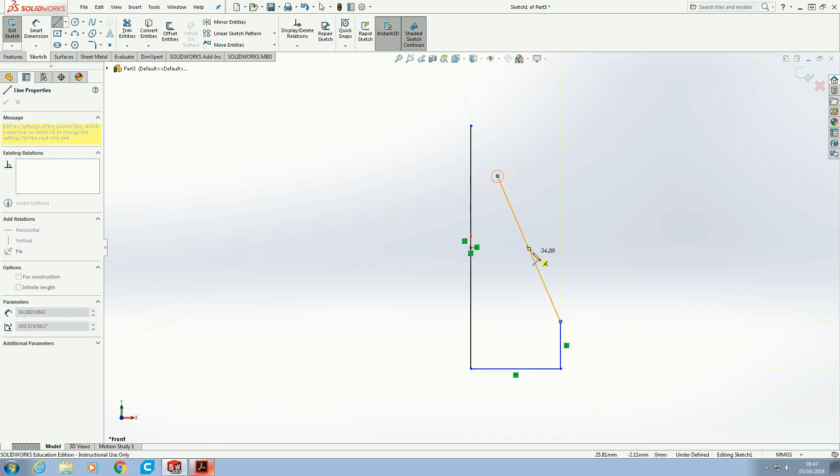5 for that bit, 10 for that bit, and 15 degrees for there. Okay, so that's fairly simple, standard, same as we've done before. There we go. So the whole thing this time is 62.5 tall to the centre of the sphere at the top, and the sphere at the top has a radius of 2.5, so the whole thing is 65 tall.

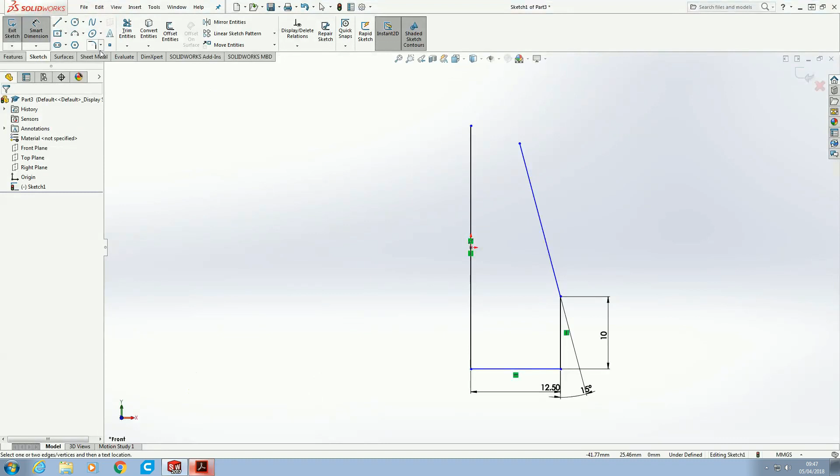So if we just make this back line 65, straight away it's a bit bigger than we're used to. Just drag this up here somewhere so we've got a reference point. So going on to here, right at the top we've got a little sphere, same way we created a sphere before, little 3-point semicircle. Remember to click the center point, hold control, click the line and coincident them so they lock on.

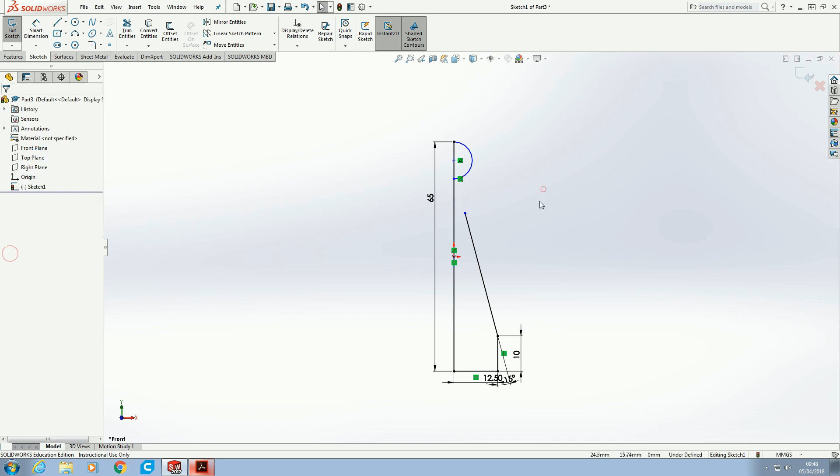So then all you've got to do is give it a radius, which was 2.5 I believe. Yeah, there we go, 2.5. Okay. So that's all the easy bits really, nothing new there at all. The complicated bit is this central section here. Now it's not a sphere, it's slightly offset, and the way that I've achieved that is by using something called the spline tool. What that basically allows us to do is to draw a curved line, but rather than giving it a radius, so it doesn't have to be a regular arc, we give it a set of coordinates for the points, which is what all of these bits here are.

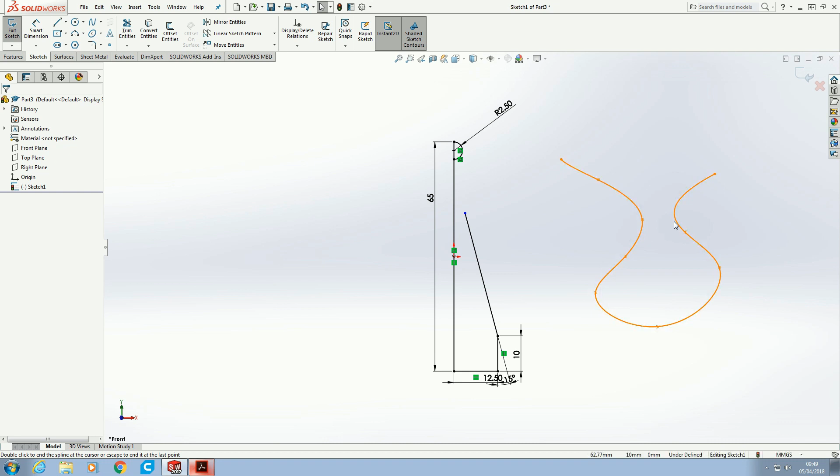So to do that, up at the top here, got the spline tool, and basically how this works is you drop in one point, and every time you click your mouse it drops a new reference point in, so it can quite happily fly around and do lots of multiple shapes, and when you get to the end, if you just hit escape, it will lock it to the last point you made. So you can quite quickly make very complex curves, and then by moving the individual points it changes the shape of it.

Now what we're going to do is draw a relatively simple one by comparison and then dimension all the points. So I'm going to click on the line just up here somewhere. That's the first point there, I want 1, 2 and then the end point clicks back onto the line. Okay, and then just hit escape. So what we're going to do there is then dimension it into place.

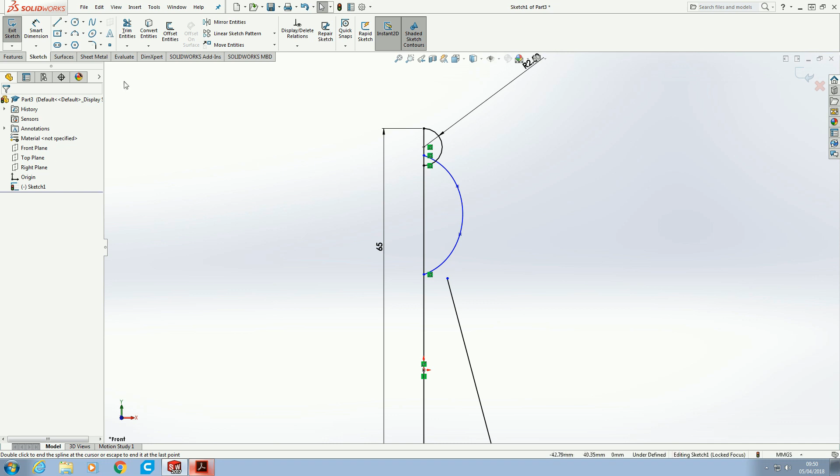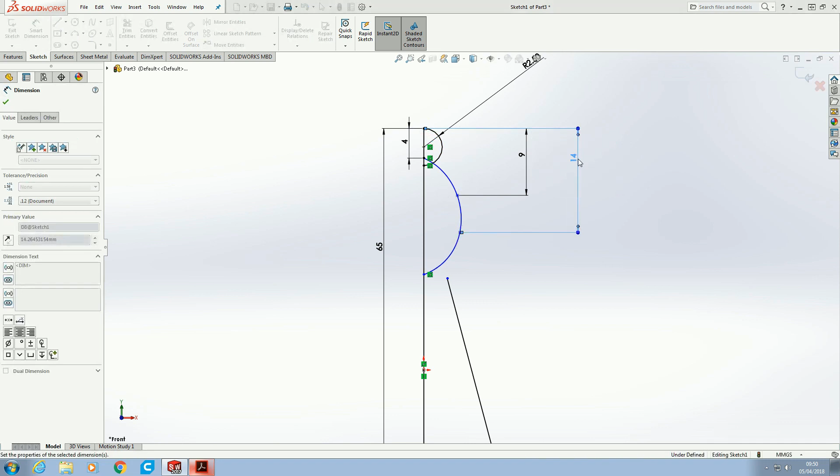So that end line, our start point there is 4 mil, so it's 4 mil from the top there. There we go. The next one's 9 mil from the top, so start going this side. 9, 14 and 19. Okay, so that's given us all the depths that way.

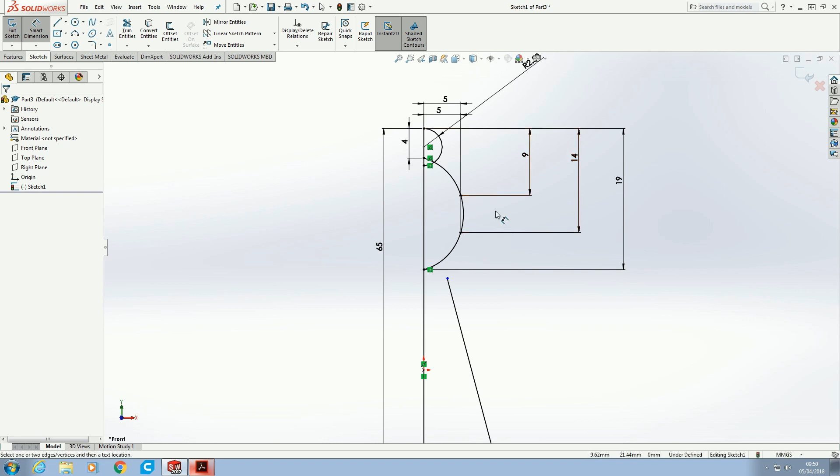Now the only other thing is this 5 mil here, so if we go from here to here, 5 mil there, and 5 mil on that one because they're the same. Now I've got 2 dimensions there. We could start using a few relations to make things a bit more tidy. So we click on that point and that point, and just hit vertical. Vertical does the same job. Okay, so we quite clearly see that that has become fully dimensioned. Got this dangling line here, so I'm just going to lock that onto there. There we go, so that's continued up at the right angle.

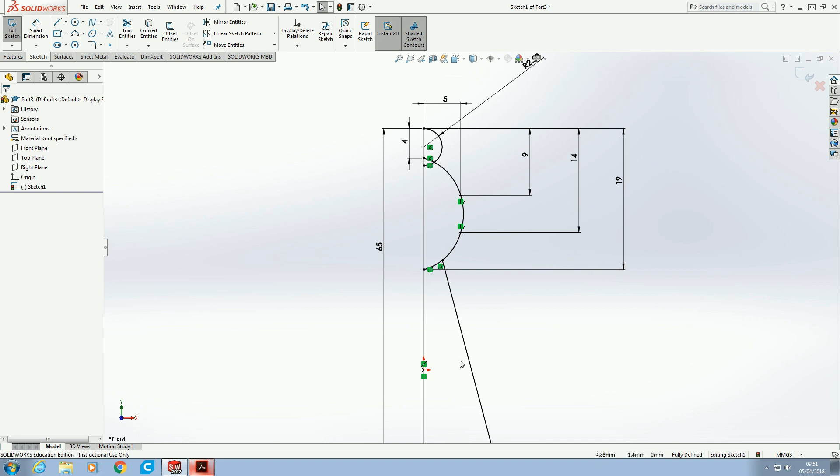What I can then do is try and clear this up a little bit, because at the moment we've broken one of the first rules really. We've got multiple closed sketches, so what we've got is our sketch, it's fully defined, but it's basically split into segments. So you've got this big segment here, a little bit here, and a tiny bit here. Now, in theory, that's not too much of a problem. It's a bit irritating, and it'll make the next bit harder. So what we want to do is get rid of as many as we can.

Now, when we've fully dimensioned it, we could just use the trim entities tool. This little arc's nice and simple, so if we just trim through the bottom here, it should cut the arc back to that line. Now it hasn't locked it, so we're just going to drag it back around and lock it again. Okay? So that's locked onto there, so it's still fully defined, it's not a problem. Now if I try and trim this bit here, it all becomes undefined, because that was one of our defining points. So let's not do that, let's just undo that.

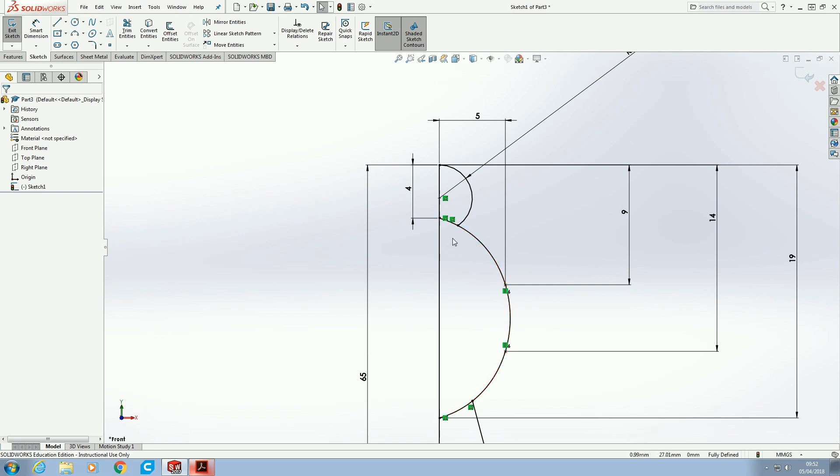Okay? Let's leave it as that. It's in 3 sections, it's not too much of a problem, none of them are tiny. You want to try and keep away from little tiny sections because it just makes life difficult. So then we end our sketch.

Okay. So, axis of revolution is still going to be this back bit. We can see now when I go to click it, it doesn't do what it's done before. It's starting to highlight weird bits. So if we click this, it doesn't do what we'd normally expect. It's not really working how it should. It didn't fill out the axis of revolution. It started highlighting weird things. This thin feature section is highlighted, as basically SolidWorks is a bit confused because it doesn't know which bits we want to work with.

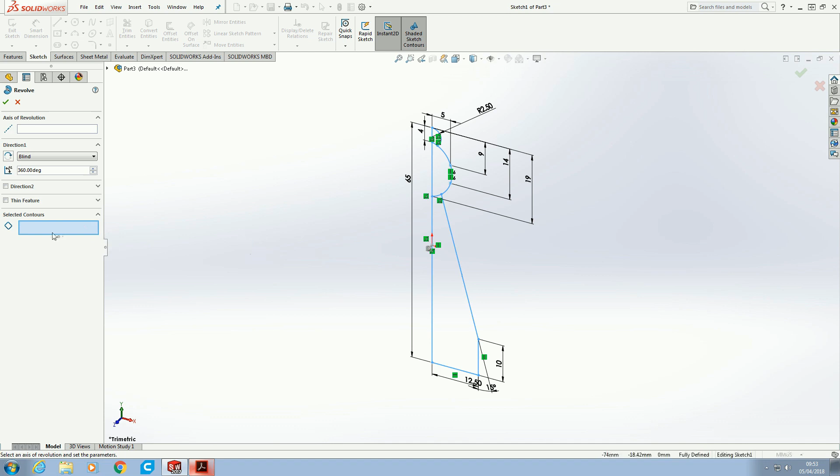So first off, untick thin feature, because basically that's just a tool for allowing you to draw a line and revolve it. It doesn't work brilliantly unless you know exactly what you're doing. We'll talk about it in a later video. Selected contours. Let's clear this because we don't want the sketch, because obviously the sketch is too confusing for it. What we're going to do is we're going to select areas. So I'm going to highlight this area. You can see there, region 1. Click there, region 2, and then just click in the last one.

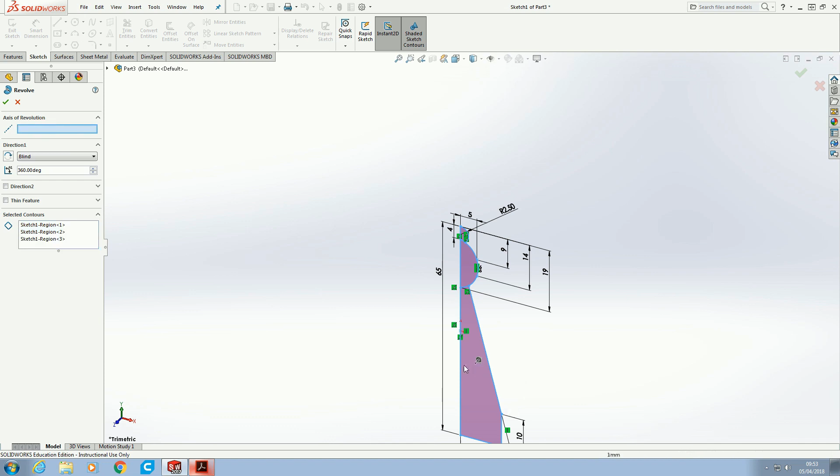This is why you don't want any small sections, because the more sections you have, the harder it is to do. The smaller they are, the harder they are to get hold of, etc. So we've got our 3 regions. Axis of revolution, click back in the box, click on the line, it's now worked happy as Larry. Tick it. There we go. So now we've got our base overall shape.

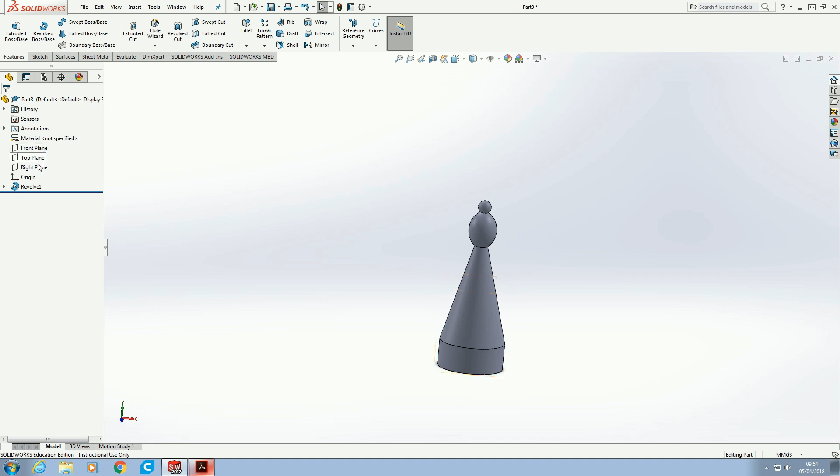Now the last bit for this is obviously this cutout here. Now as we said in the past, doing cutouts on curved surfaces is quite difficult, but it can still be done. So looking at this, we can't really select on the edge, we're going to have to select on a plane. So we're going to look for our planes that run through it. So I'm going to select the right plane this time, go normal to it.

Now remember, you have to have the plane selected before you hit extrude cut, because it makes life easy. If you haven't got it selected beforehand, I'll show you what happens. So if we hit extrude cut, we now want to select the right plane. Obviously it's disappeared. We can expand this and we can hit right plane there. Doesn't matter too much either way, it's just easier to select it first.

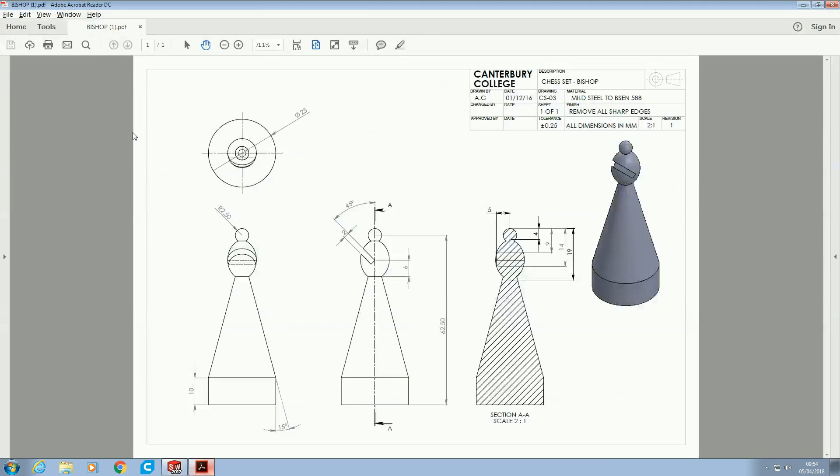Now what we want to do is we basically draw this square at an angle, which becomes a little bit complicated because we can't just use our regular rectangle tool. We could use one of these ones here though. So let's use our 3-point corner rectangle. Before I do that, just to make my life easy, I'm going to drop a centre line in. And you'll see why in a second, because it makes referencing later on a little bit more easy. So we've got a centre line up the middle, it's fully defined because I've done origin to top.

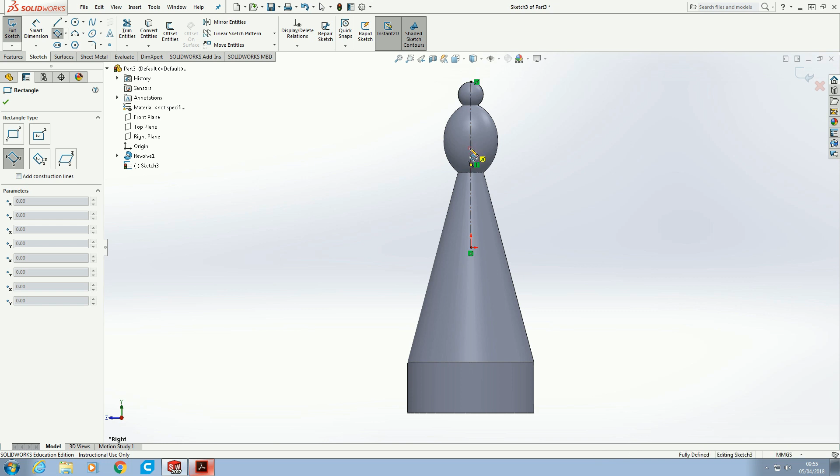And now I'm going to do a 3-point corner rectangle. So I'm going to select 1 point, 2 points, 3 points. Okay. Now I've deliberately gone too big, I've gone out the edge. I'll show you why in a second. So, got our rectangle. Nice simple sizes. It's 2mm that way. That is at a 45-degree angle. That's basically what we're told about it. So it's 2mm there.

Now this is why we've thrown our centre line in, because our centre line is fully defined. We can then dimension off it at an angle without it moving. It will just move our rectangle quite happily. So let's put that 45 in. Now the last dimension there is it's 6mm from the tip of the corner that's touching the centre line down to the neck. So you've got the neck here, that point there, and that wants to be 6mm. Okay, there you go. So that's fully defined. All this bit hasn't defined the end bit yet.

Now you could, in theory, drag this down and just attach it to the edge there. I always worry about that because it's going to start throwing up zero-thickness errors and this kind of thing. So sometimes it's better just to leave it so it cuts outside of the object. So it's a little bit tricky on this one, try to get the right angle. There we go. So as long as you've made it bigger than it needs to be, it doesn't matter too much. So I'm just going to round that down to 7.

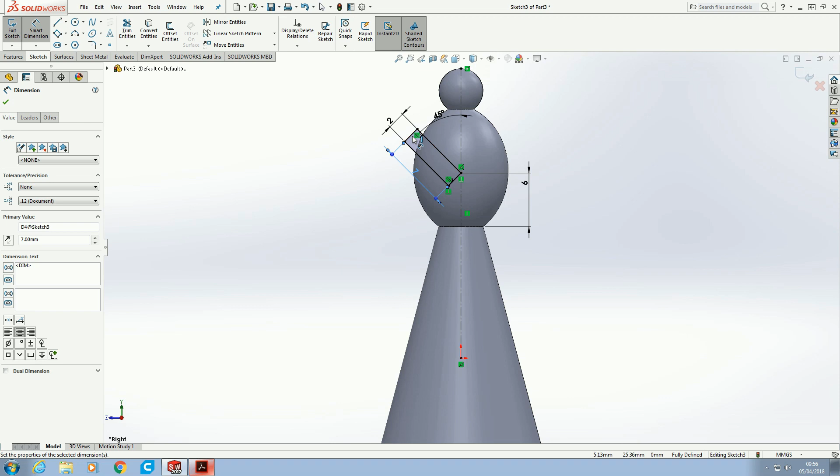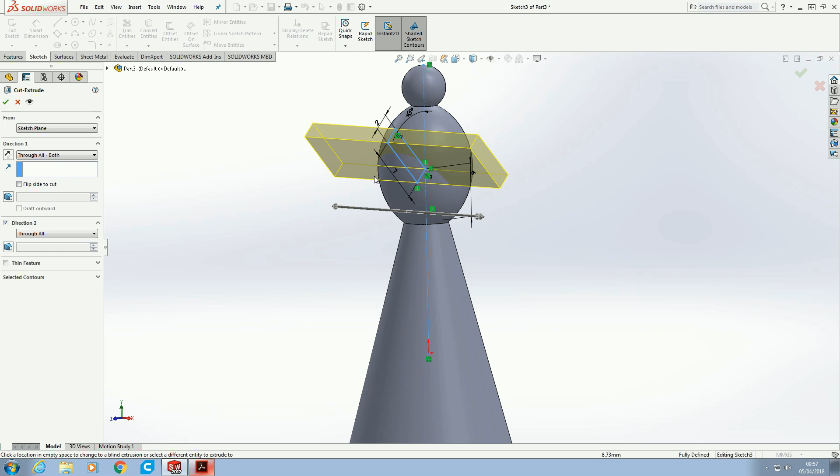There you go. It's fully defined. It does go outside the object, but that doesn't matter. If it's cutting thin air, it's cutting thin air. As long as it's cutting through the body, it's all good. So we're going to end our sketch. Now we've got extrude cut already selected, and it's gone out just that one side. Now we can do through both, and that takes it out both directions. It's cutting through the entire object. Just tick it. There we go. And then we have our fully finished bishop with our little cutout.

Now, not too complicated, but there are some new tools in there, so if you need to do it again, just run through it just so you know what you're doing.